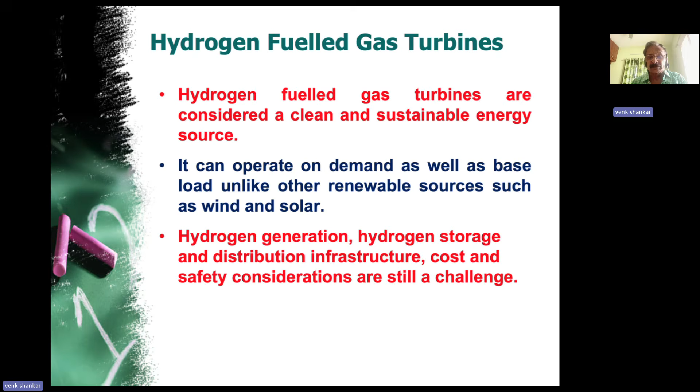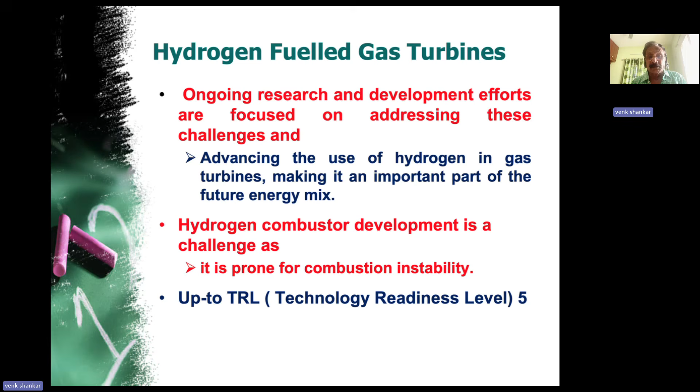Now, brief introduction. Why hydrogen? It's a clean energy source, and the gas turbine can operate on demand as well as base load. Challenges are hydrogen generation, storage, and safety. You won't believe if I say in our own country at Neyveli, there's a lot of hydrogen produced, and that will be used for this project. Ongoing research and development efforts in the international arena are happening. And why not we do this? That's how we have started this one. Now we have ANRF project approved activities for 5 years, both analytical and experimental.

Now, what is the aim and objective? I have been honored to spearhead the hydrogen gas turbine research project and take it to technological readiness level 5, taking on board faculty and students. To take host university research to multi-level, engaging in state-of-the-art international research to mentor faculty and students. Now, these are the approved activities. What have we done in the last 2 quarters?

First, we organized ourselves. To carry out this work, we opened up 4 laboratories: thermofluid laboratory, fuel and control laboratory, surface engineering laboratory, and lab scale testing laboratory. And there's a systems engineering group. Why? Because later on the combustor has to be fitted between the compressor and turbine of a proven gas turbine. And one postdoc support in this project.

Now, typical combustor configuration: earlier my students worked on it, and there was an ASME poster in the conference, and we did some analysis and showed results also. A similar configuration is started on, but here the injector is a pressure atomizer, but it is not going to work for our project. So I draw from my earlier experience in Liquid Propulsion Systems Centre, Indian Space Research Organisation. We did the liquid apogee motor engine, which took us to the Moon, which had coaxial injection elements. I plan to use that concept in this project.

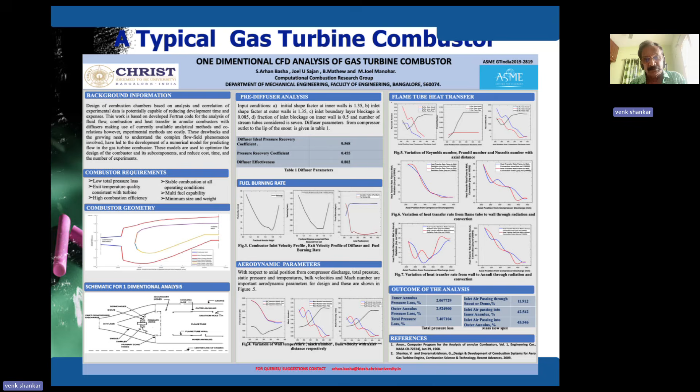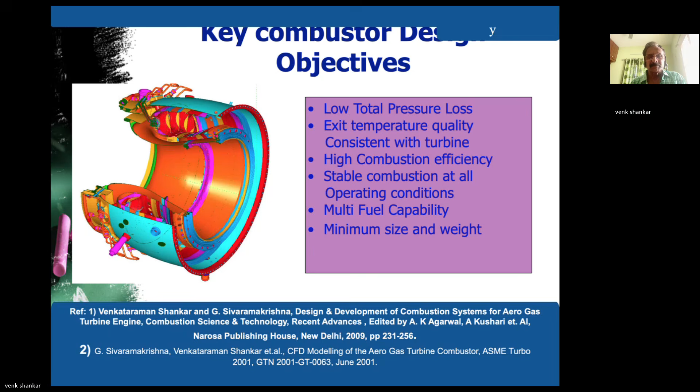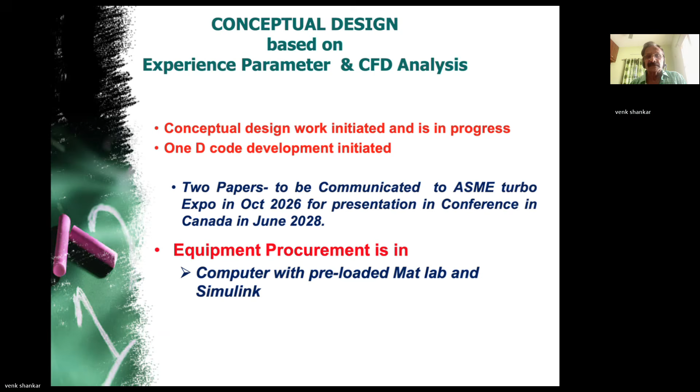Then this is the combustor. You can see the cut section clearly. Requirement: low pressure loss. This is the killing factor. Normally the target is 4-5%. With great difficulty we achieve 6%, I tell you. Then temperature compatible with the turbine. Then multi-fuel compatibility we were talking about earlier. It is no longer applicable here because 100% hydrogen has a unique injection characteristic. Research methodology: conceptual design based on experience parameters. Then of course we will present papers in conferences, we will give them for review.

And what is important, another area is high temperature coating. We use high temperature nickel chromium alloy in these combustors. But by coating this with a ceramic, we get a temperature gradient of 130, which is beneficial to us in thermal management when we experience high temperatures of the order of 3000 in hydrogen combustion. Incidentally, earlier I had experience in FGM, functionally gradient material. An ISRO RESPOND project I had on INCO superalloy, and we had quite a bit of publications on that. And ISRO also appreciated it would be useful for the re-entry vehicle.

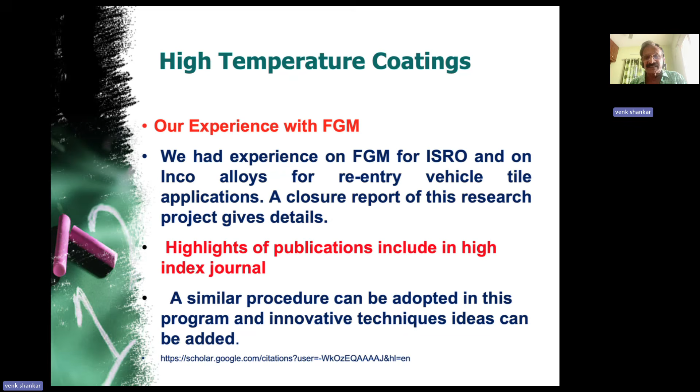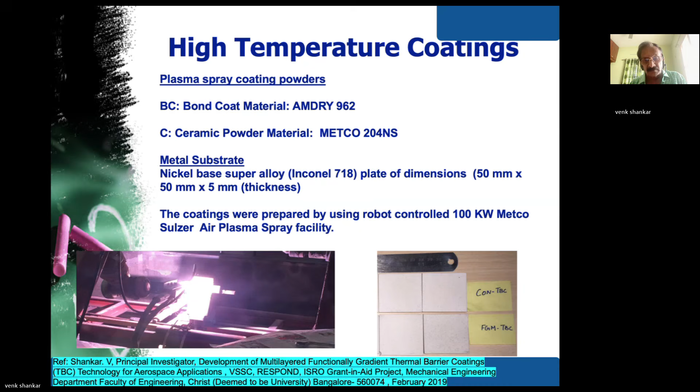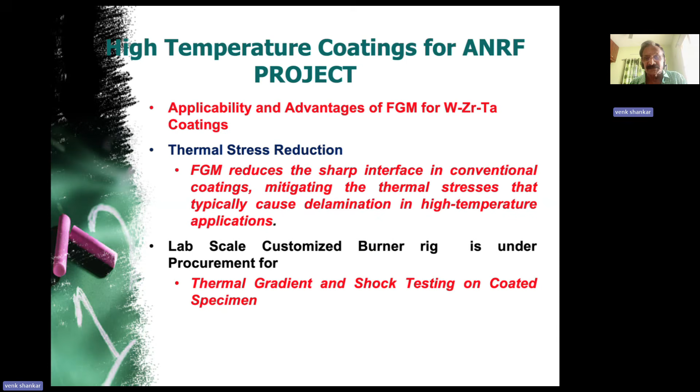See, this is the laboratory scale setup I created to evaluate the thermal gradient capability and the thermal shock capability. Now, in this project, it's a hydrogen atmosphere. So, we are to go in for tungsten, zirconium, tantalum coatings. And in the same FGM route, I plan to go. And already procurement of lab equipment for this burner rig is in process. We are doing so much work, effort, energy, so many people.

And what is the potential end use? After we bring it to TRL 4 level in 5 years, it has to undergo TRL 5 to 9 before being retrofitted between the compressor and turbine of a proven gas turbine. Our collaborating institutions: Indian Institute of Technology Madras is the hub and Annamalai is the spoke. We are in discussion. They plan to do the planar laser induced fluorescence evaluation, optical diagnostics, and National Aerospace Laboratories Bangalore is interested in doing some testing for us.